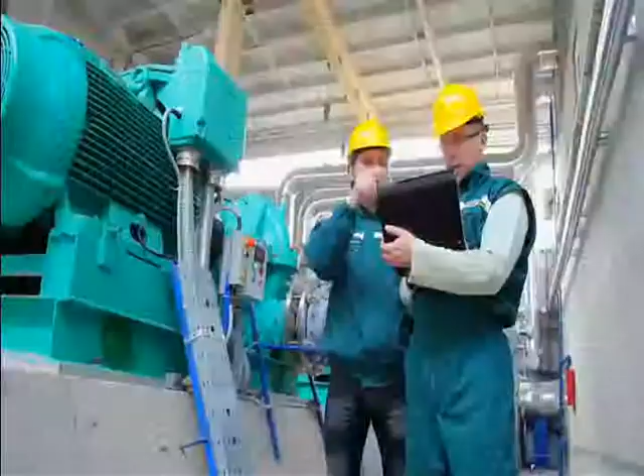We're back. Assuming your boss is going to pry a few dollars out of his wallet, let's show you how to get the most shaft alignment value for his budget with the S-660 wireless shaft alignment system, the most powerful entry-level system on the market.

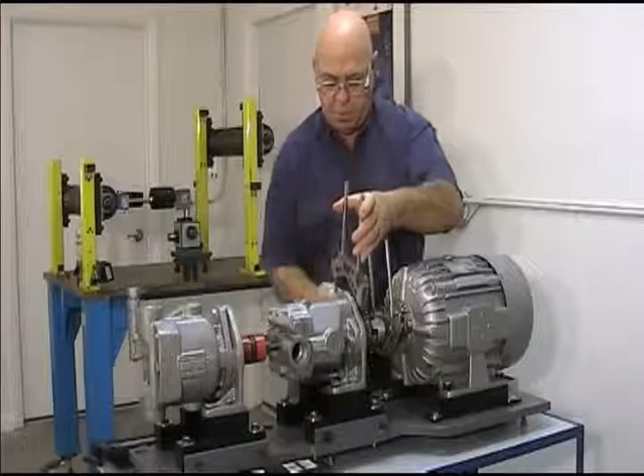So let's get started. First, we'll start with the hardware. Simply place each bracket on the shaft and wrap the chain around the outside diameter, sliding a link on the pin and tightening the knob. Notice that the extra chain can be folded up using the magnetic tip to help protect the equipment.

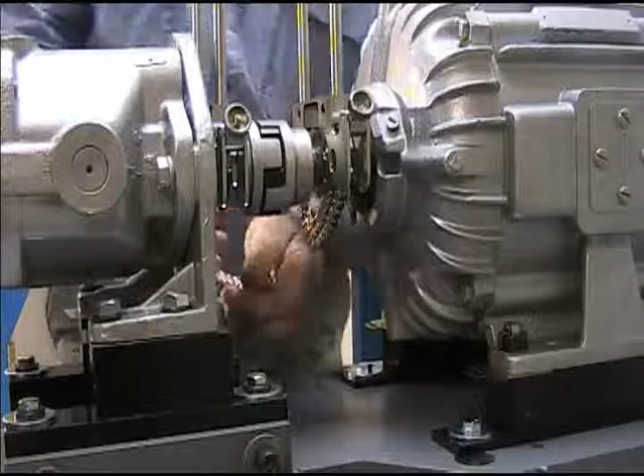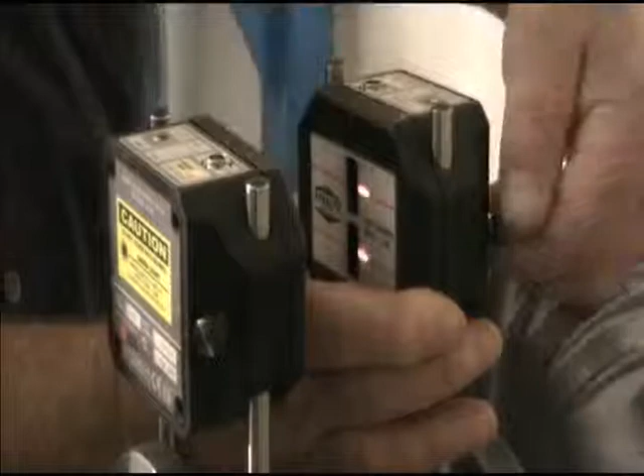Next, slide the laser and the target onto the posts and tighten the thumb screws to clamp the heads firmly in place, making sure to adjust the laser lines so they line up with the center line on the target and are centered in the windows. The laser is now pre-aligned to the target and is ready to take data.

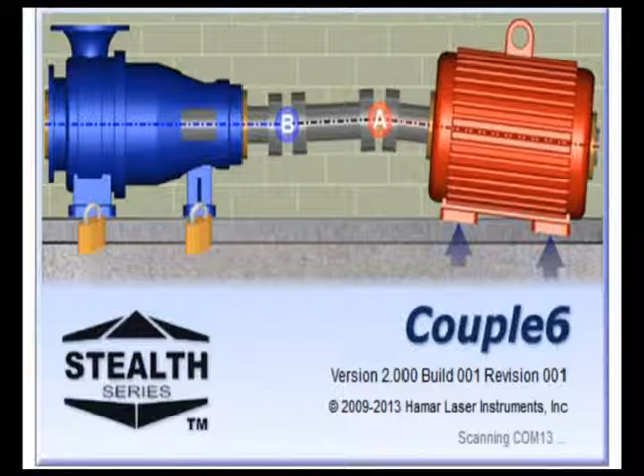Now let's boot up the software by tapping on the S-660 icon on the Windows desktop. Notice in the lower right corner of the opening screen, the software automatically scans the COM ports to locate the stealth target. Once connected, the main screen opens and we can see the status bar that shows the Bluetooth signal strength, target serial number, excess vibration detector, remaining target battery life, and ambient light detector.

To start a project, click on the Project Manager icon in the main menu. Then click on the Create New Machine icon and enter the machine name as well as the company name, address, and any notes for the project. This creates a standard Windows folder for the machine and saves an emailable project file with a date and timestamp. This helps organize your machines and keeps track of alignment history.

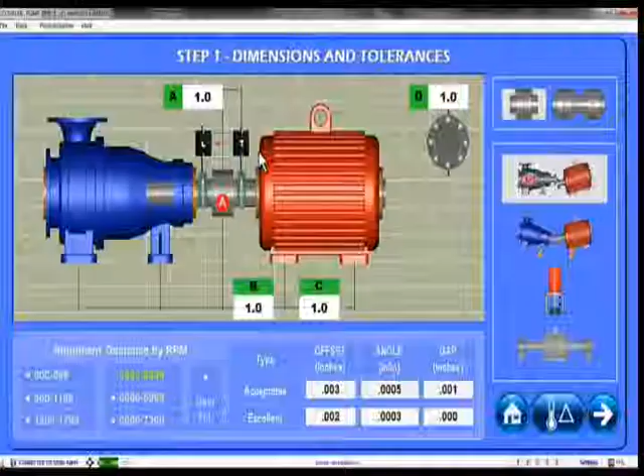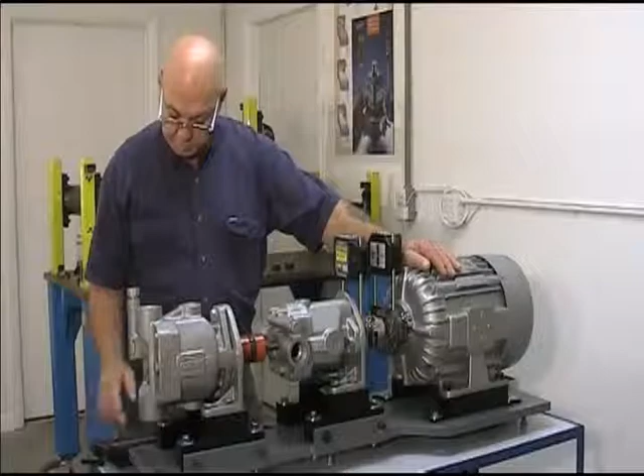Now from the S-660 main menu, click on the Step 1 icon to pull up the dimensions screen. Select the coupling and machine types and begin measuring. To enter each dimension, press and hold the entry box to bring up the keypad, type in the dimension, and hit enter. Continue to measure and enter all 4 dimensions to an accuracy of 1/4 inch, or 6 millimeters.

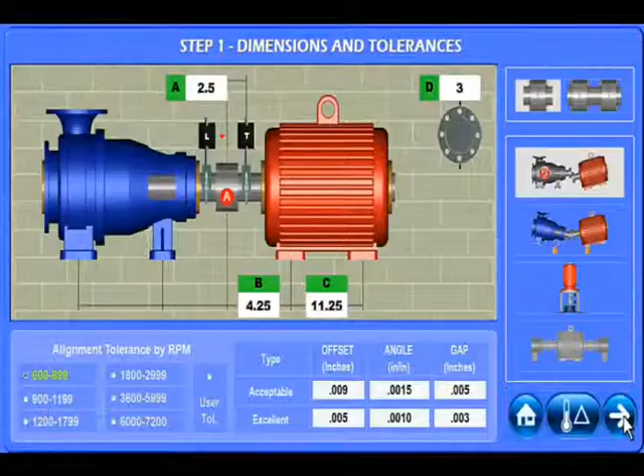Then select the machine's RPM to set our 2-tier color-coded alignment tolerances and hit the next button to go to Step 2, laser alignment. One of the great features of the S-660's dual scan technology and its 20mm PSD is

that you can start taking alignment data without having to do a pre or rough alignment of the motor just so the laser can take data, a common problem with our competitors' over-under technology. It also means you can skip the rough alignment process for new motor installations and start using the S-660 right from the beginning. This saves a lot of time.

By first having aligned the lasers to the target center line, you should be ready to go. If not, an arrow will tell you whether to move the target up or down the posts, and the vertical offset values and laser line graphics update as you move the target. When the arrow turns yellow, green, or disappears, you are centered on the PSD and ready to go to Step 3.

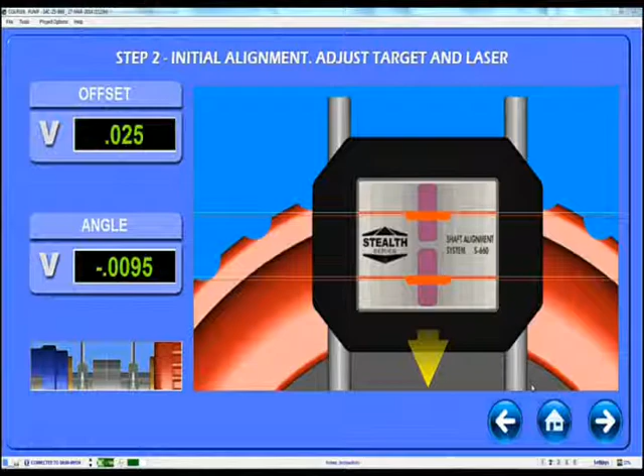One of the most important aspects of good alignment is making sure the motor's feet are parallel to its base, commonly called softfoot. Checking for softfoot can save you hours and hours of work.

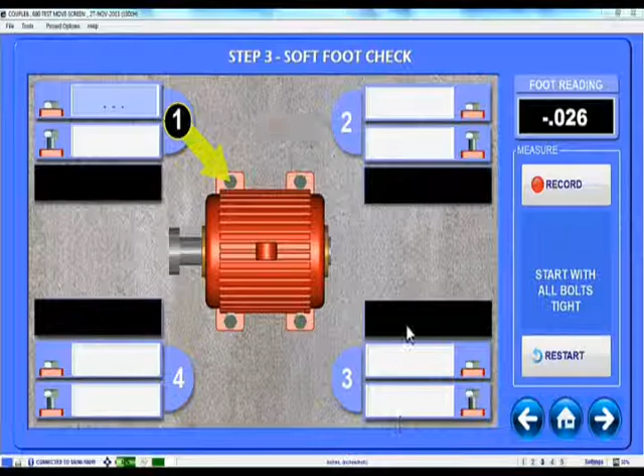You'll notice on the screen there are 4 data-taking areas, each representing 1 foot. To get started, make sure all 4 bolts are tight and then click the Record button, which records the data for foot number 1. Loosen the bolt and click Record again.

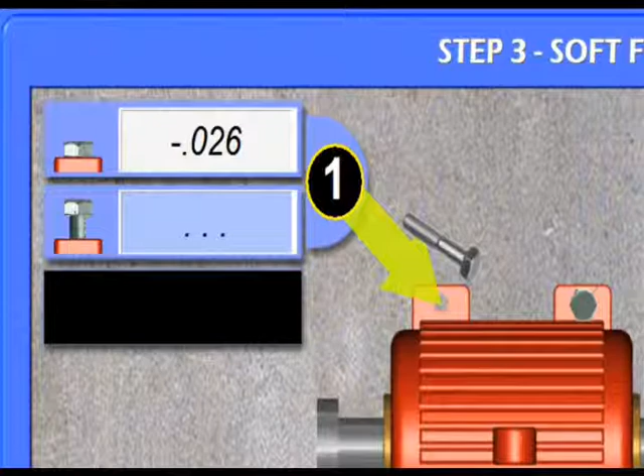If the foot movement is within tolerance, then the display will turn green. If not, it will turn red. Notice S-660 reminds you to tighten the foot and shows that foot 2 is ready to take data. Continue this process for all 4 feet, following the on-screen instructions.

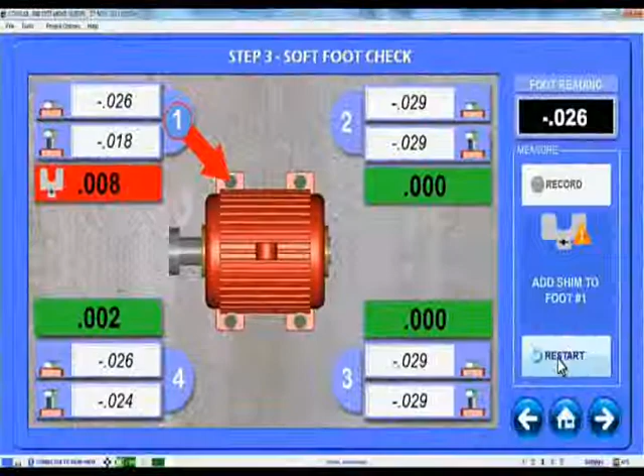S-660 will then identify the foot with the biggest change in alignment value, and if out of tolerance, recommend the shim to fix it. All you need to do is add the shim, tighten the bolt, and retake the data to confirm the softfoot has been fixed. Now let's click Next to go to Step 4 and start taking alignment data.

To determine the results in any shaft alignment application, it is necessary to rotate the shafts and record data to remove bracket mounting errors. The S-660 offers the most versatile data-taking method of all entry-level shaft alignment systems, which is auto clock. To take data, just rotate the shafts to any of the 8 clock positions in any order.

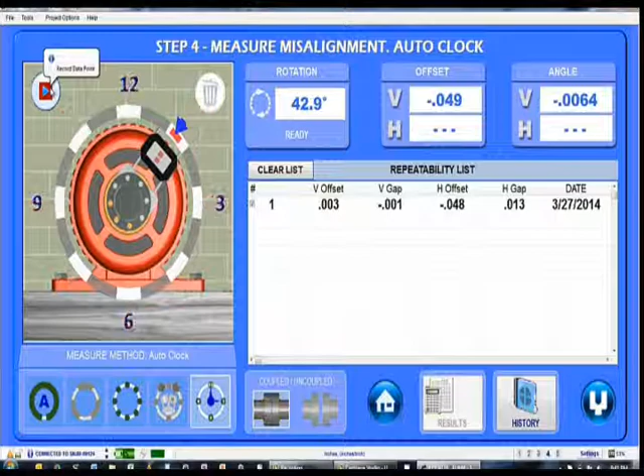You can even skip points. An arrow will tell you when the target is in the data-taking zone and ready to record a point. So just hit the Record button and a color-coded dot will appear in the data indicator ring so you know what point has been recorded.

Red means not enough data, blue means good, light blue is better, and green is the best. S-660 only needs 3 points to calculate the alignment results, although we recommend recording more points to increase data accuracy and repeatability. To calculate the results, hit the Done button to open a pop-up showing the recorded alignment data.

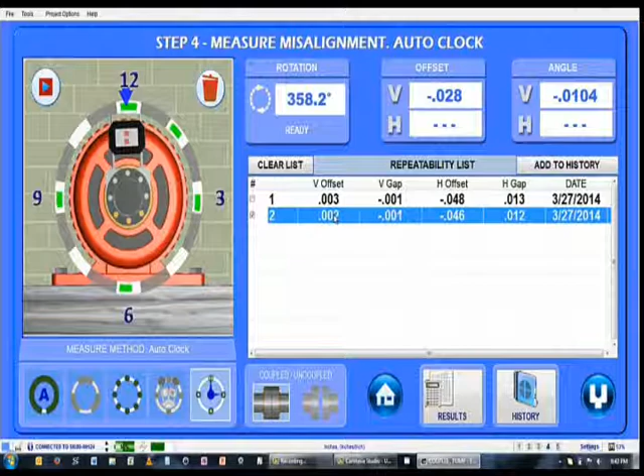Click Accept to save the values in the repeatability table. To see if the alignment data is in tolerance, tap on the Set of Data and click the Results button to open the Measurement Results screen, which shows the data with the tolerances applied from Step 1. Green means the results are excellent, yellow means they're acceptable, red means they're out of tolerance.

If the alignment is out of tolerance, close the Results pop-up and click on the shim icon to automatically save the data and open Step 5, Live Move screen.

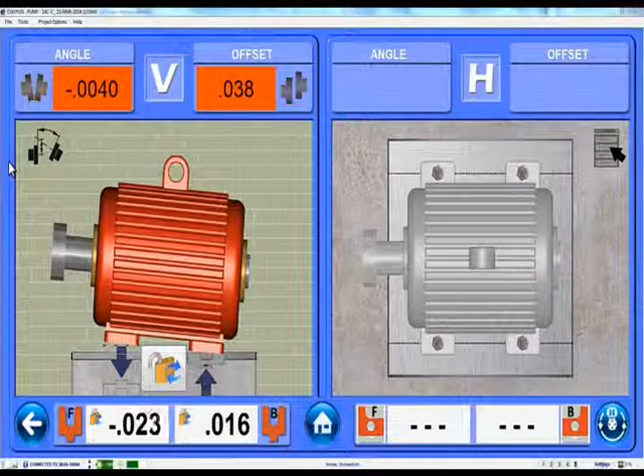To make alignments amazingly easy, Couple 6's Step 5 Live Move screen offers automatically updating motor graphics and live data values in two different formats, gap offset or angle offset. A simple click of the format icon toggles between the views.

For those who like to see the alignment at the coupling, Step 5 also allows the user to zoom into the coupling by selecting the coupling zoom icon in the view menu. To zoom out, just re-click the zoom icon and the motor view will reappear.

Another great feature in Couple 6 is our Flip It feature, where you can flip the motor image and foot values if you find yourself on the wrong side of the machine. No more using the display box upside down.

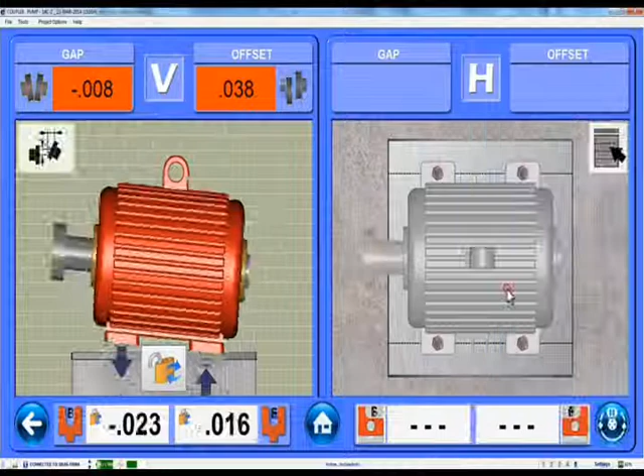At the top of the screen, Step 5 shows the gap and offset values for either the vertical or horizontal alignment planes, both continuously updating with each move of the motor. At the bottom of the screen, Couple 6 shows the calculated shim and move values, which also update continuously. Arrows are also used to indicate whether to add or subtract shims and which way to move the motor.

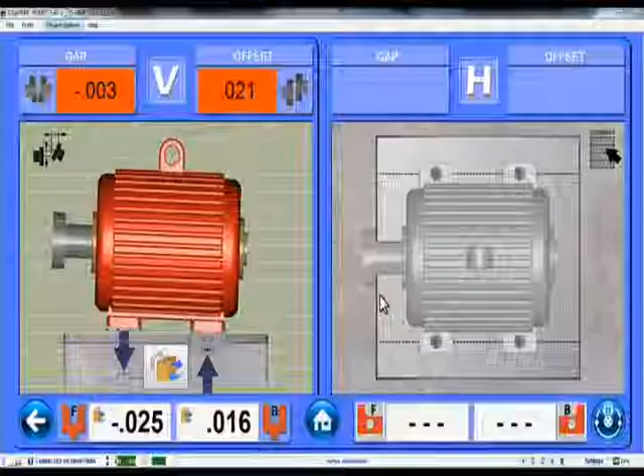To align the motor, first you add the shim. Notice how the vertical gap offset values and the motor image update as you insert the shim. After that, rotate to 3 o'clock or 9 o'clock, and Couple 6 automatically switches to the horizontal alignment plane without having to retake data. Notice as we rotate the shafts, an indicator icon tells you the shaft rotation position.

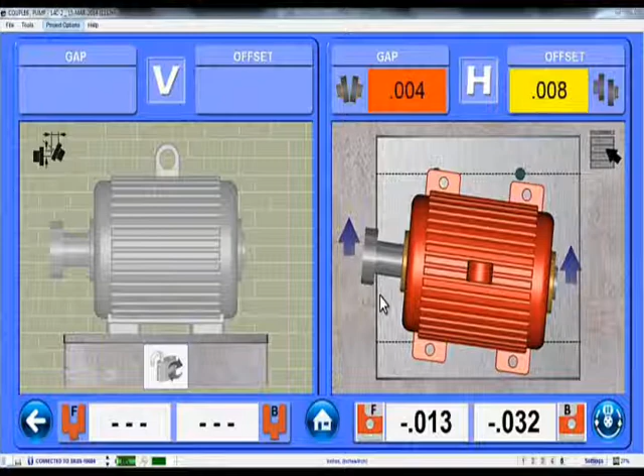The amount you need to move the motor is shown as foot values at the bottom of the screen. Move the motor in the direction as shown by the arrows until the color-coded display turns either yellow or green. Notice when the alignment values are green, the bolts are installed on the feet to indicate the alignment is completed.

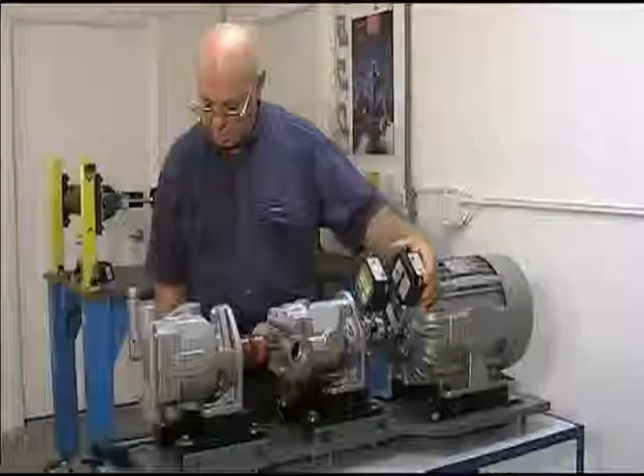Now it's important to verify the alignment, so just hit the Remeasure button and Couple 6 automatically takes you back to Step 4. Take another set of data as shown before, and when you're done, click the Results button and verify that all the values are in tolerance.

If so, we're ready to print the report. The data is automatically saved, so click the Home button to go to the main menu and then click on the Print icon. Select the sections of the report to include and whether to print to paper or PDF for emailing. You can also preview the report before printing.

So with all this value, maybe you don't need a pry bar after all.